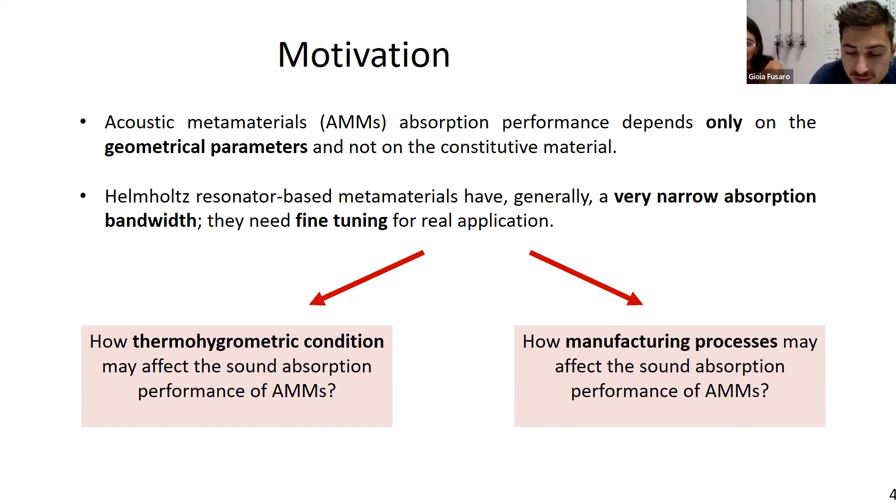So we asked two questions: how thermohygrometric conditions may affect the sound absorption, and how manufacturing processes may affect the sound absorption performance. For these two questions, we focused on our case study, which was the coiled up resonator.

That is made up of a spiral tube embedded in a rigid circular disc and covered by a front panel and a back panel. The acoustic properties of the coiled up resonator depend on geometrical parameters.

These are the length of the inner spiral, the size of the perforation, which in our case is square, the radius of the sample, and the porosity of the front panel, which is the ratio between the opening area and the total area of the sample.

The first step was to quickly prototype a sample of coiled up resonator with the following geometrical parameters: the length of the spiral, the side, and the diameter of the sample.

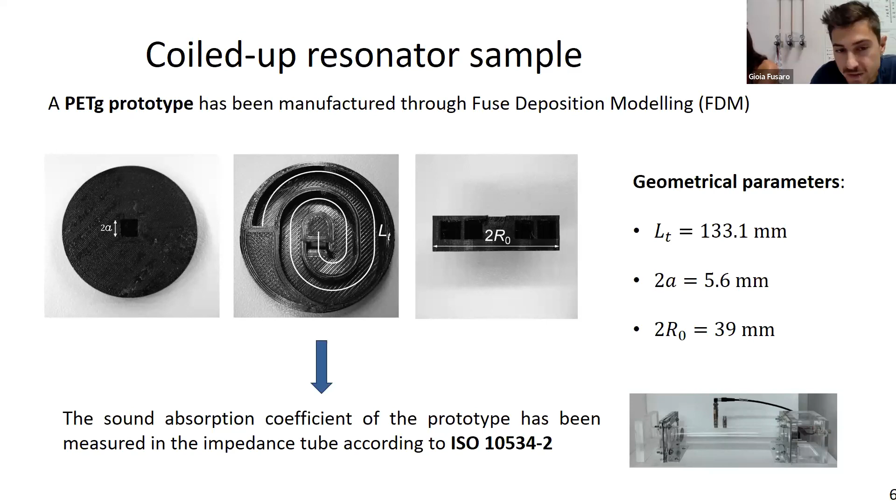We defined three parameters to take into consideration for our study: the max amplitude of the sound absorption, the frequency of the resonance, and the inverse of the quality factor.

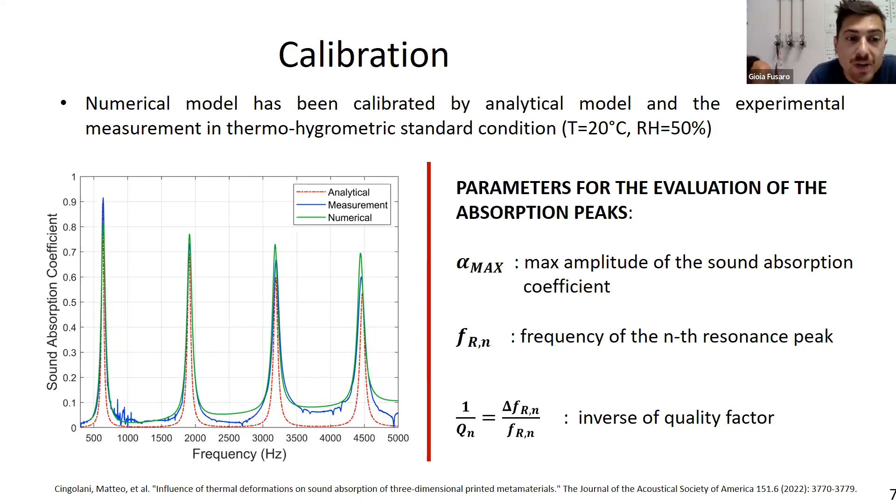And we investigated the thermohygrometric variation on the sample. First, we fixed a temperature of 20 degrees, and we changed the relative humidity from 20% to 80%, measuring the sample under these hygrometric conditions in the impedance tube. We found that the relative humidity variation turned out to be negligible, because it doesn't change the frequency and the amplitude of the resonant peaks.

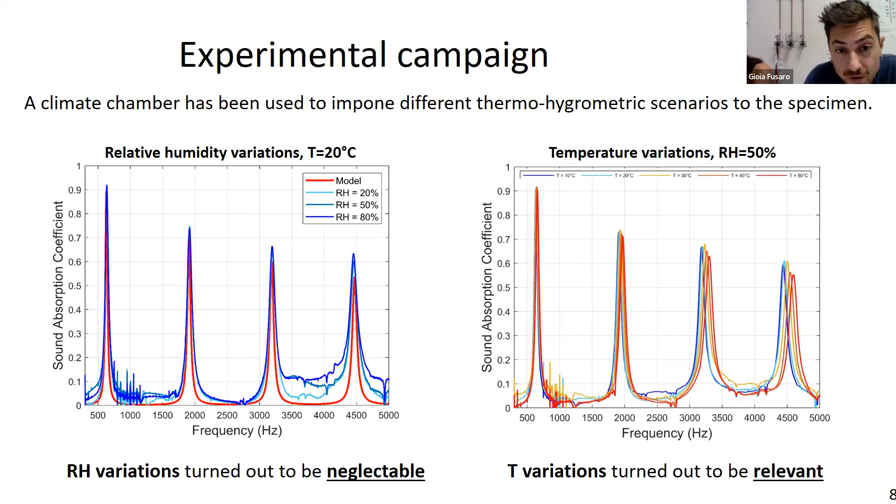On the other side, we fixed the relative humidity at 50%, and we made measurements with different temperatures from 10 degrees to 50 degrees with a delta T of 10 degrees. In this case, we found that the temperature variation turned out to be relevant.

So we focused on the temperature variation, and we studied the delta F, the delta frequency, for each peak of the resonator.

In the first peak, there is a delta F of 36 Hz from 10 to 50 degrees. The second peak shows a delta F of 64 Hz. The third peak shows a delta F of 122 Hz. And for the fourth peak, there was a delta F of 156 Hz.

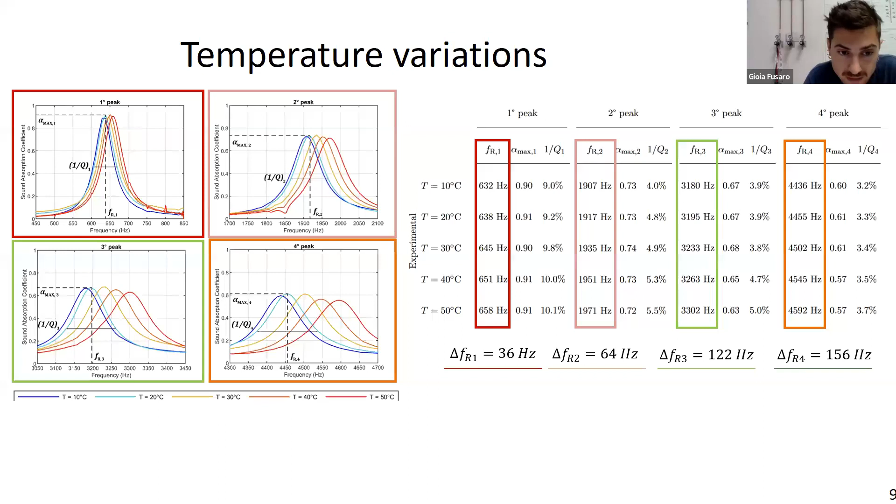So what does it mean? It means that as the temperature increases, the resonant frequency increases, and the reason why the resonant frequency increases is that there is a thermal expansion that shortens the length of the spiral and increases the frequency of each resonating peak.

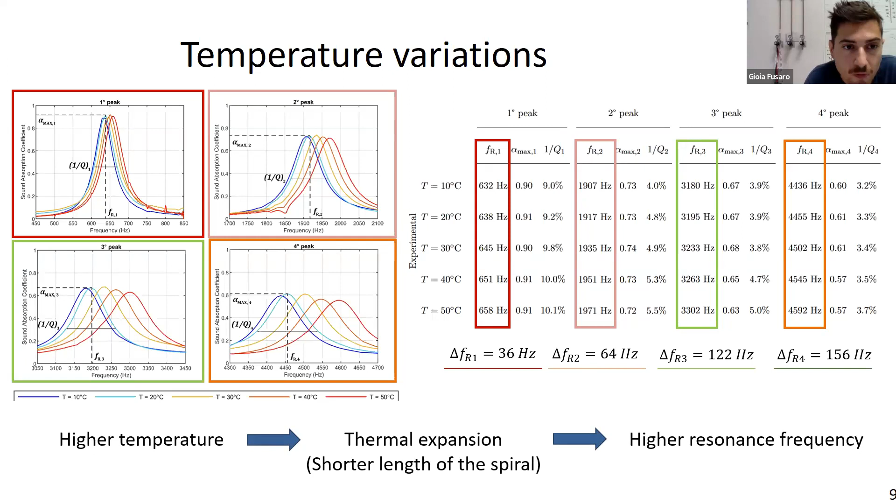At the end of the study, we compare the regression curve coming from the experimental data of the impedance tube experimental campaign with the Clash-Rynkiewicz model, a model that defines the behavior of polyethylene in terms of thermal expansion. Both follow an exponential trend.

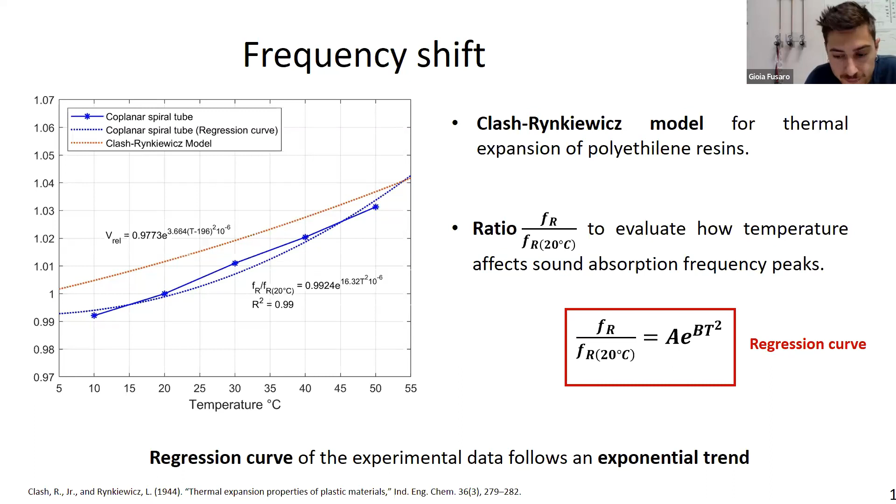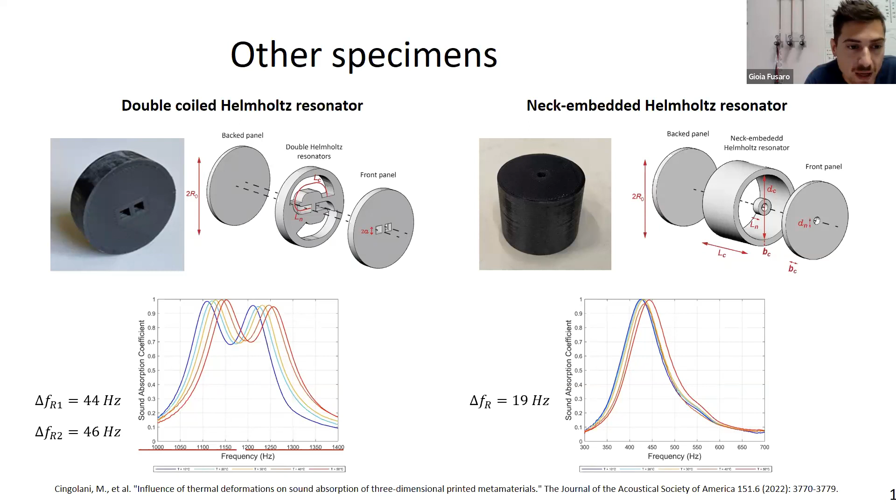We did the same for two other kinds of acoustic metamaterial, the double-coiled Helmholtz resonator and the neck-embedded Helmholtz resonator. The method was the same we used for the coiled-up resonator, and we found a delta F for both of them, and the trend the experimental data follow is always exponential, which could be compared with the Clash-Rynkiewicz model.

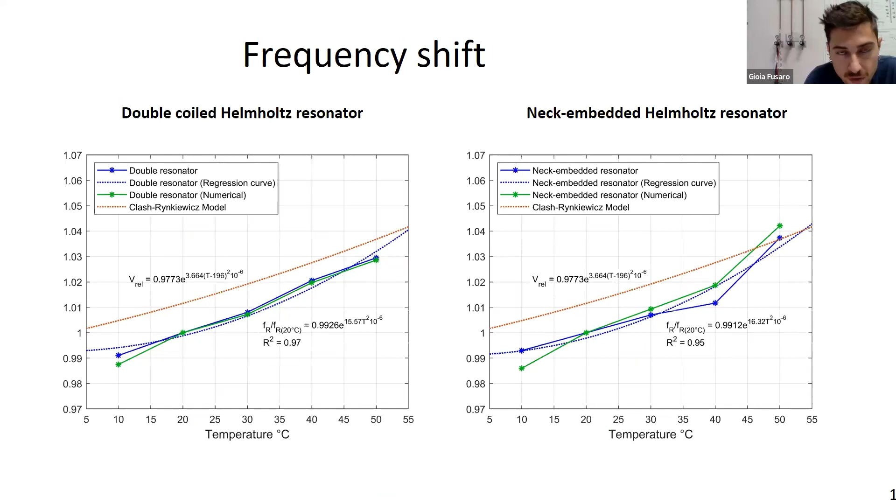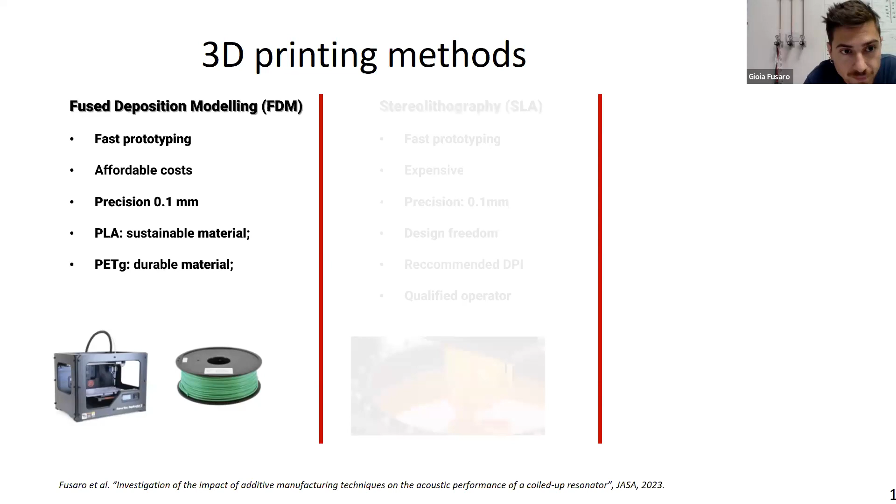After that, we focused on 3D printing methods, studying how manufacturing processes could affect the acoustic performance of the coiled-up resonator. We studied three different printing processes: fused deposition modeling (FDM), stereolithography (SLA), and selective laser melting (SLM). FDM is a very affordable process, and its main advantage is that it can use sustainable and durable materials like PET or PLA.

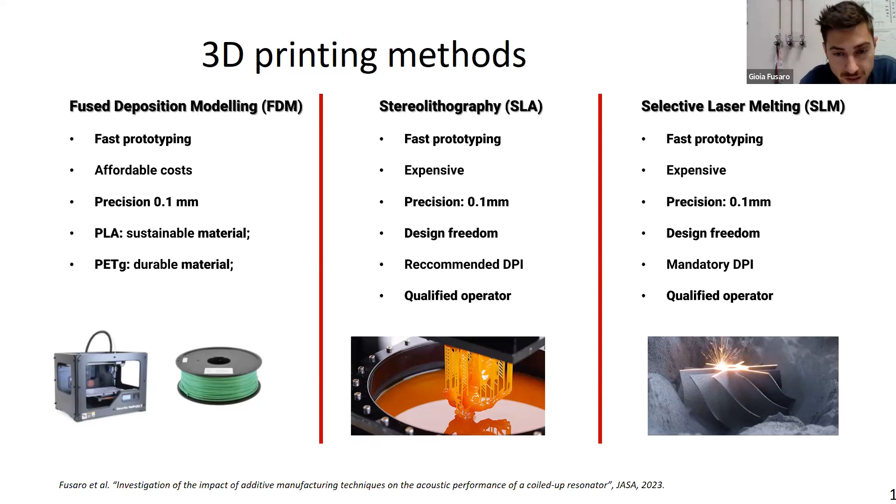Stereolithography is a more expensive process and needs recommended DPI and a qualified operator. Selective laser melting is also expensive, more expensive than FDM, and allows design freedom, but at the same time requires mandatory DPI and a qualified operator.

Our case study focused on three different printing technologies and four different samples. In particular, we can see in the picture a PLA sample made by fused deposition modeling, a PETG sample also made by fused deposition modeling, a resin sample made by SLA technique, and a steel sample made by SLM technique, in order to compare the variety of parameters involved in different manufacturing processes.

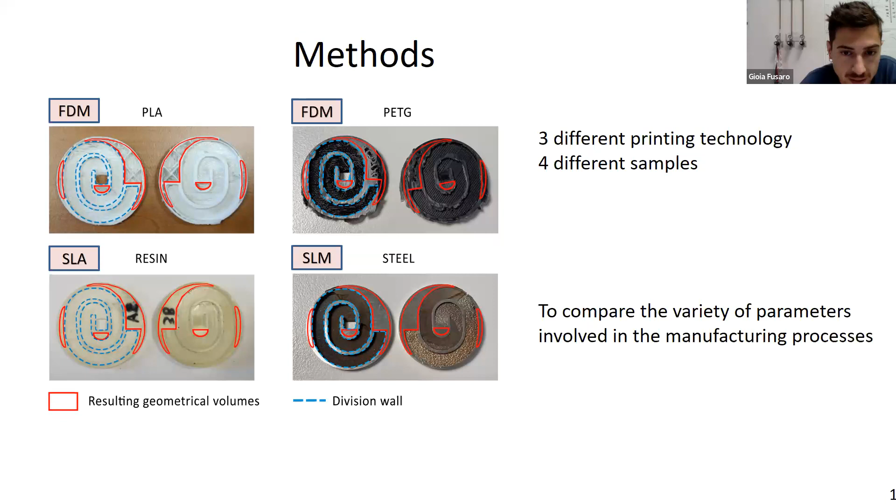The results of the first experimental campaign show that there are many differences in terms of sound absorption coefficient. In particular, we can see that the resin sample and the PETG sample match in a better way the analytical model of the coiled-up resonator. The other two, the SLM sample and the PLA sample, don't match the provisional model.

So we wondered which were the potential manufacturing parameters to consider to study their influence on the quality of the acoustic metamaterials. We found the roughness of the inner walls of the coiled-up resonator, the infill density of the samples, and the printing quality and speed parameters.

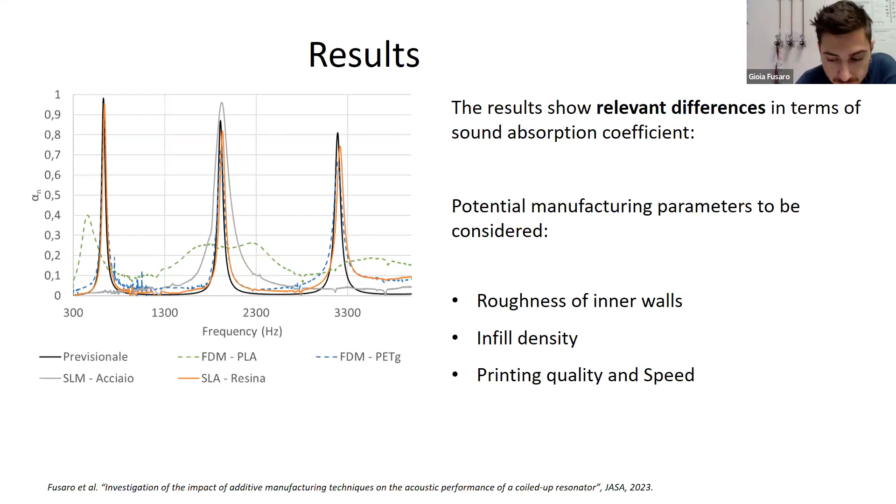The first step was to study the roughness of the inner spiral. We used a roughness tester to measure all the samples, and found that the best samples in terms of sound absorption coefficient were the PETG and the resin, but they showed different values of roughness. The PETG showed very high roughness values, while the resin showed a very low value of roughness. This means that roughness does not affect sound absorption performance, at least for the coiled-up resonator.

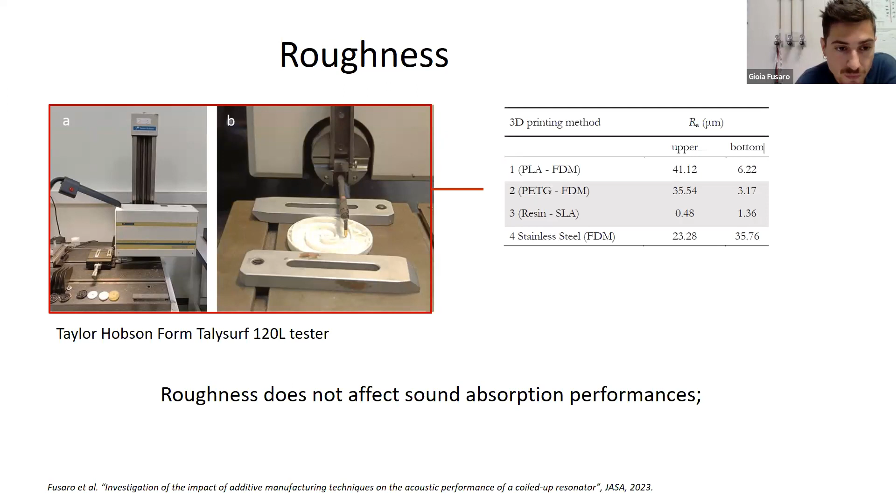On the other side, we studied the infill. To study the infill density, we set up a configuration for the PETG sample and 3D printed 5 different samples with different infill densities. We found that from an infill density of 30% onward, there is good matching with the provisional model, but below this value the experimental measurements show no matching. So it means the infill density affects the sound absorption of the coiled-up resonator.

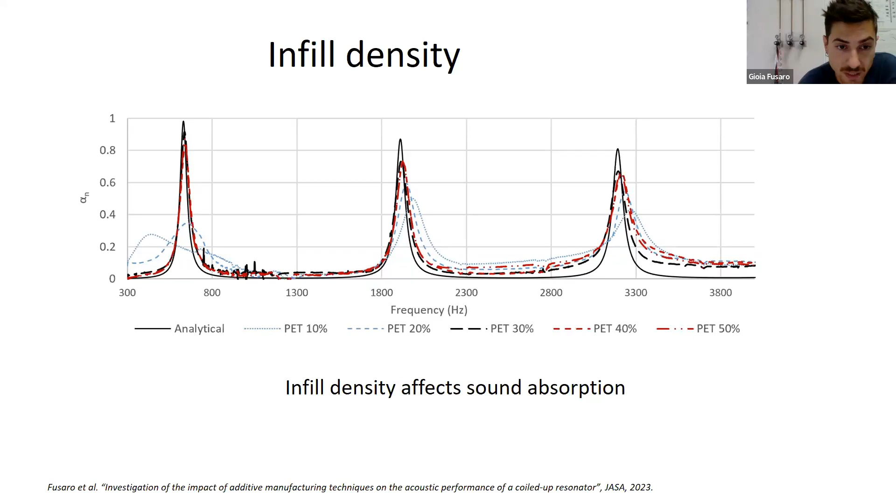The last part of the work was studying the different printing speed and printing quality of the 3D printer. We defined two different settings of printing speed, which we call the slow one and the fast one, and two different settings of printing quality, which we call the fine one and the coarse one. In total we could do four different combinations of printing, and we 3D printed four different samples.

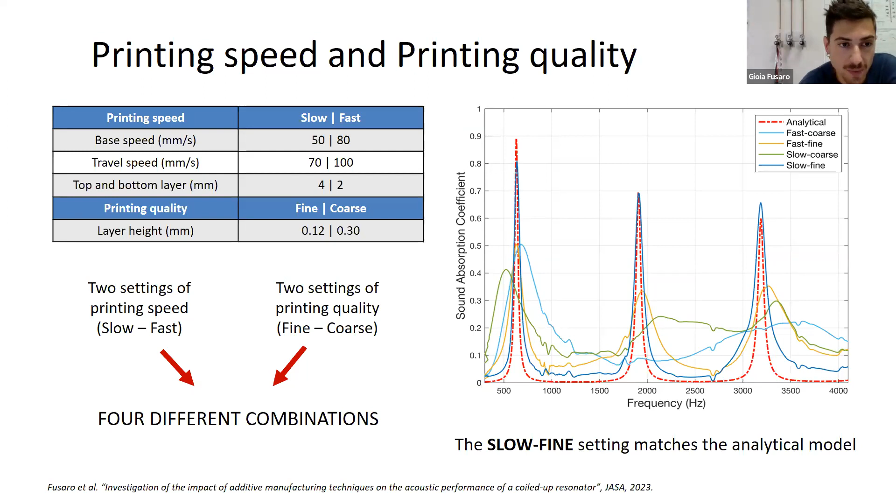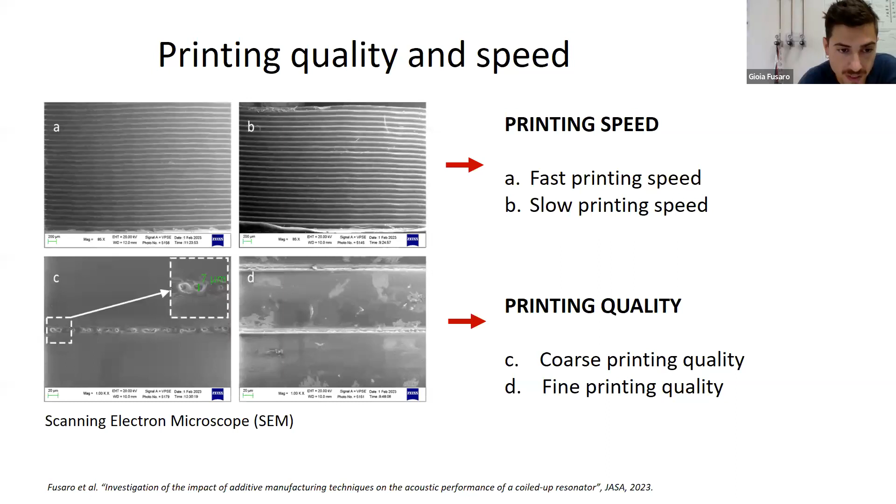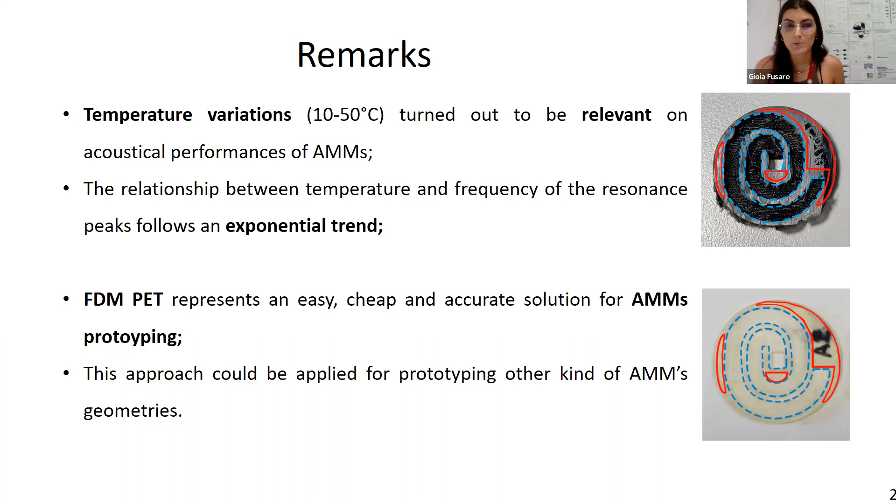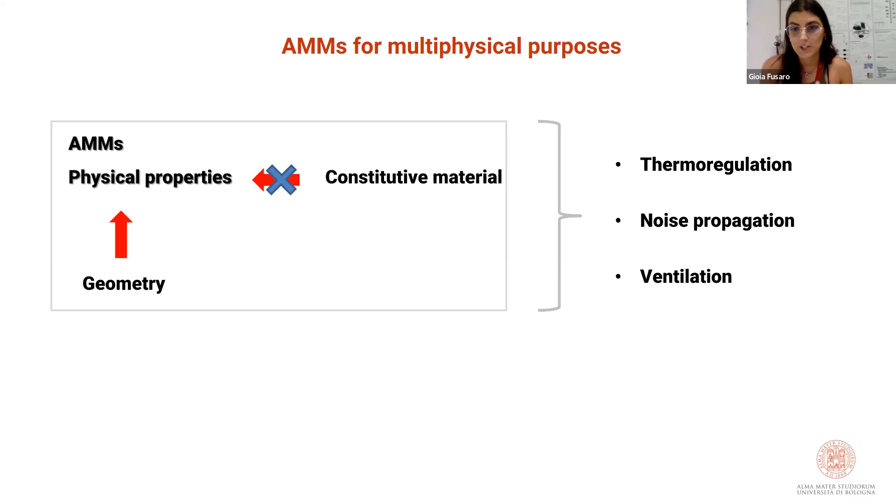So we can characterize them in order to optimize the final shape, for example for thermoregulation functions or noise propagation, insulation, or ventilation. For these specific tasks, we are going to see a case study represented by the acoustic metamaterial-based ventilated window.

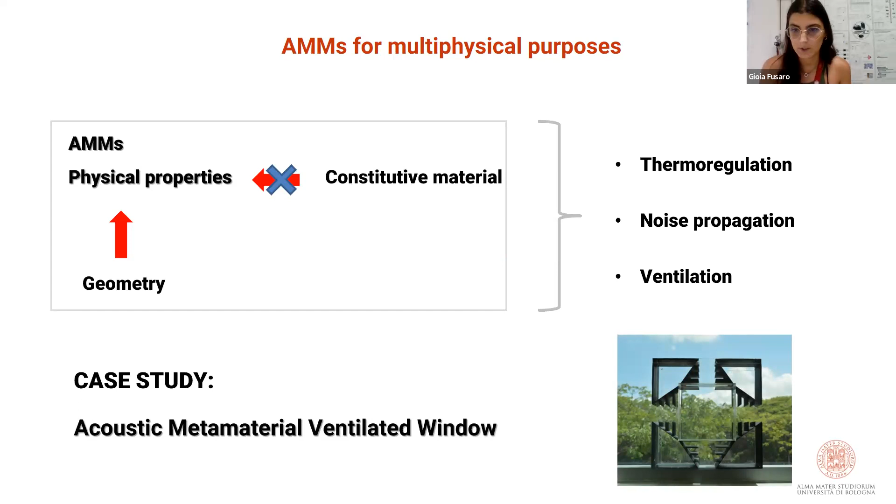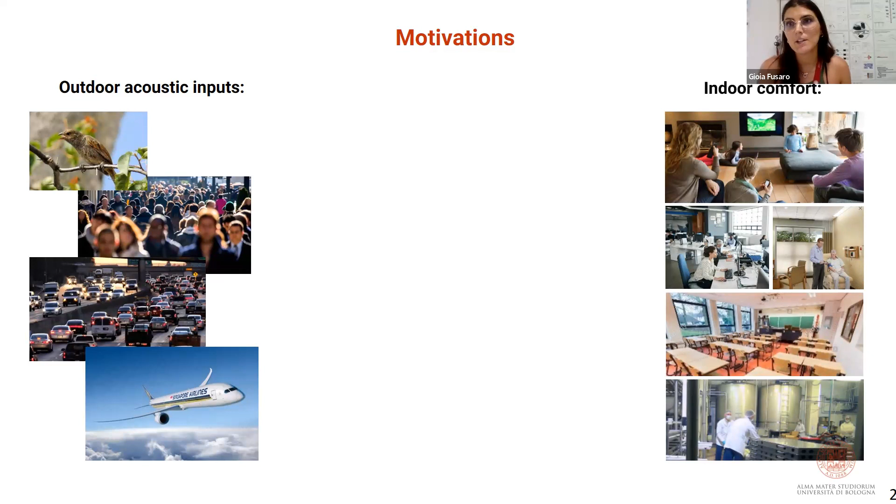First of all, we are all familiar with different outdoor acoustic inputs, and this is something everybody can relate to, compared to different indoor comfort scenarios. These are definitely two opposite sides when we consider outdoor and indoor inputs, and we are going to analyze how we can filter or optimize the first in order to have optimal indoor comfort towards the second.

At the same time, we all know there are already existing methods that can solve this problem, for example activating active noise control or through mechanical ventilation. However, at the same time, we have to face the environmental issues that we are going through and will go through in the next years and decades.

And for this reason, regulatory governations are going to ask and suggest we develop as passive as possible systems, in order to make new technology as sustainable and environmentally friendly as possible. From this motivation came the idea of an acoustic metamaterial-based window, which I started in Sheffield and Singapore, and now I'm continuing here in Bologna with the industrial engineering group.

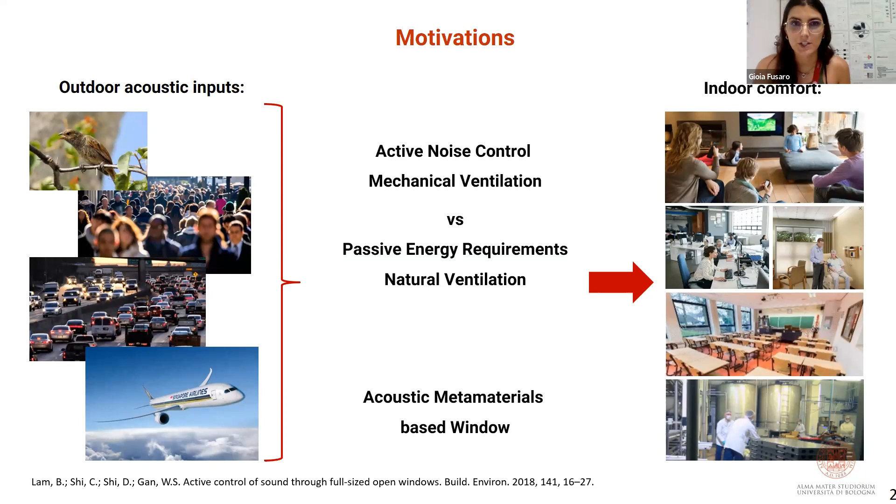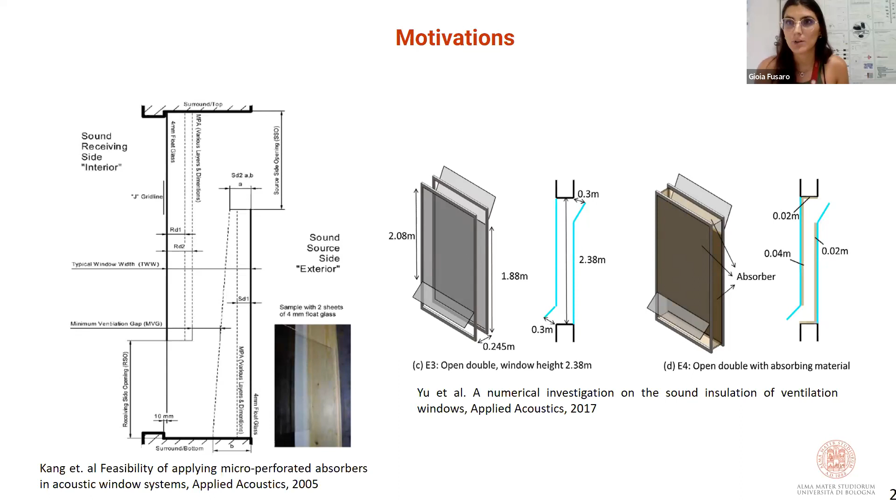For window design, we already had some attempts at solving this problem, allowing natural ventilation and noise insulation at the same time. However, most of these attempts ended up as quite bulky solutions, limiting the design from the designer's, architect's, or engineer's point of view.

On the other side, in the last decades, metamaterials have paved their way for improving engineered systems, optimizing them from both a constitutive material point of view and a multi-physical function point of view. However, there is still a lack of ergonomic studies and guidelines that can help researchers or engineers design metamaterial-based products toward a more ergonomic and user-centered approach.

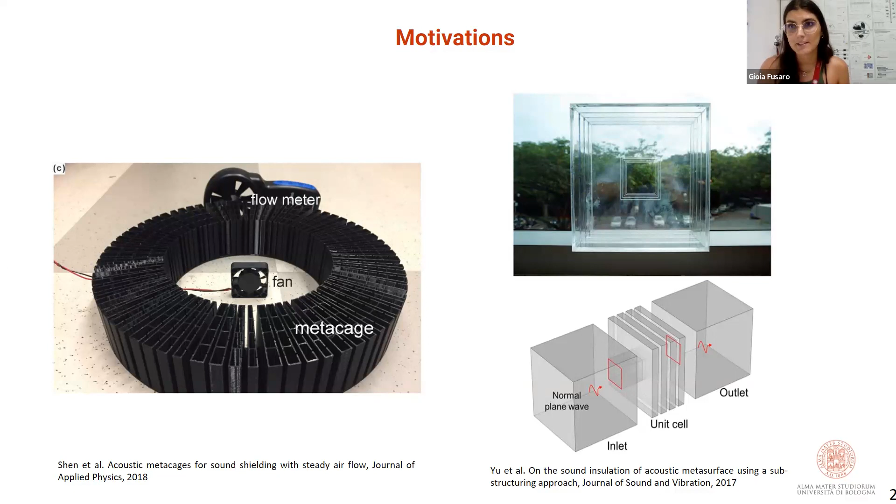For example, this first example comes from my PhD research, where we focused the metamaterial technology on the outer part of the system, leaving the central part to function as a visual connection - a transparent panel - and using the lateral part for noise regulation and ventilation.

As we can see, this is a quite basic acoustic metamaterial approach using an acoustic black hole system, or quarter-wavelength resonator system, applied in a three-dimensional configuration. In this way, airflow passes through the system while the incident noise wave is partly reduced by the resonating flanks and volumes facing the ducts where the noise passes through.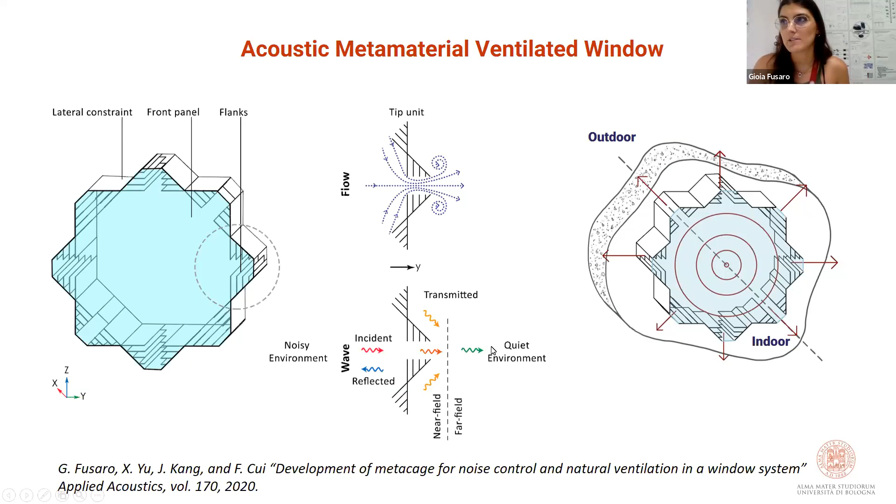Since this research was a mix of both material research and social science research, after designing and defining an optimal unit cell, we developed it to create an acoustic metamaterial to solve this problem. We then tried to adapt it in the most ergonomic way possible, through both questionnaire and participatory design methods. This way, we managed to reach a design that could allow both the physical function and an ergonomic approach usable by the final user as well.

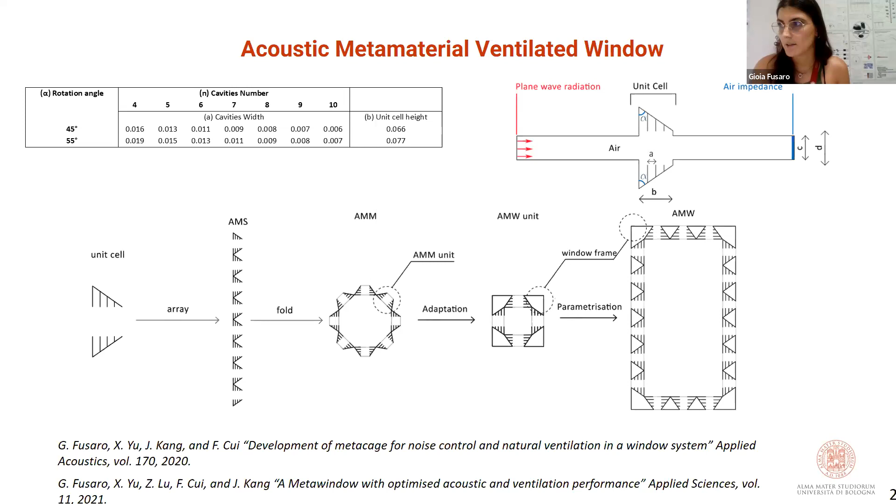This metamaterial-based window is applied on the outer wall of the building, dividing the outdoor condition from the indoor condition, and is characterized by two parameters significant from the participatory design research: the height of the frame of the window, and the different openings in order to allow gradually more or less ventilation flow.

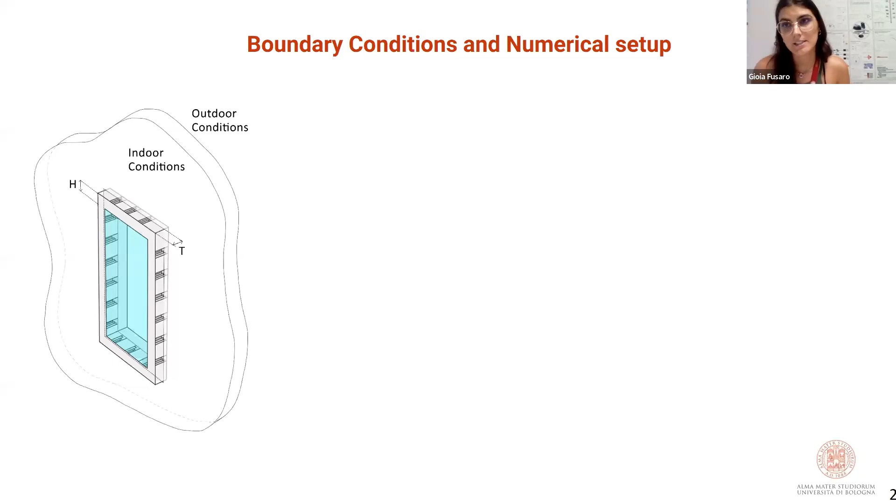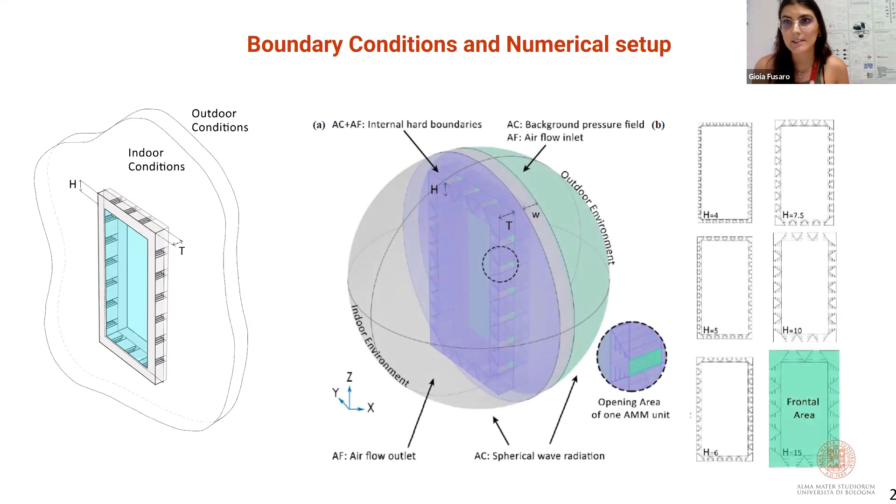This is a very brief configuration of how the model was done in a numerical study through COMSOL Multiphysics. This numerical part was used for optimizing the design of the model through different geometric parameters.

We need to consider the configuration optimization going from the first one, where the acoustic metamaterial unit cell is presented with panels inclined at angle alpha with different flanks that produce resonant cavities facing the ducts, where both airflow and acoustic wave propagate through.

We wanted to optimize it also from the space, exploiting as much as possible all the volume included in the system of the window. To do this, we perforated the panels facing the cavities and the duct, allowing us to have a higher volume of resonance.

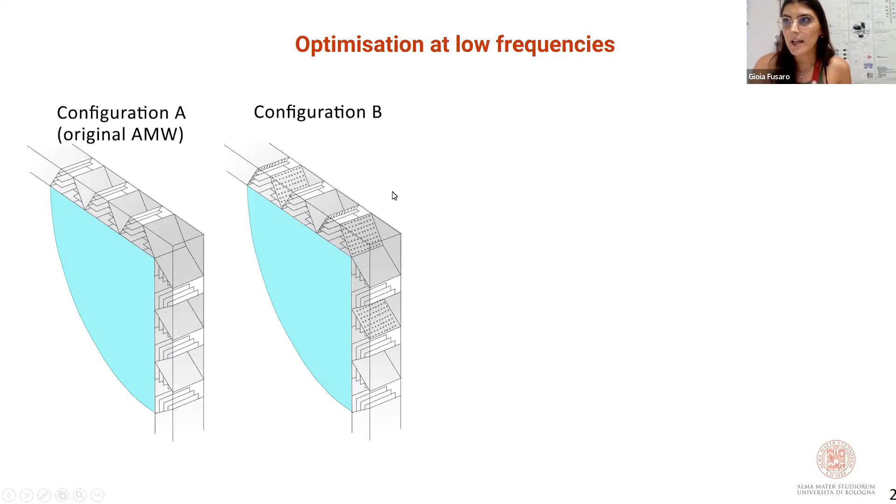For the sake of industrial design strategies, and different manufacturing approaches, we decided to try and test two different configurations of perforated panels. The first one, called configuration B, has both perforated panels facing one duct, meaning we have two different unit cells to be produced: one with the panels perforated, and one with the panel not perforated.

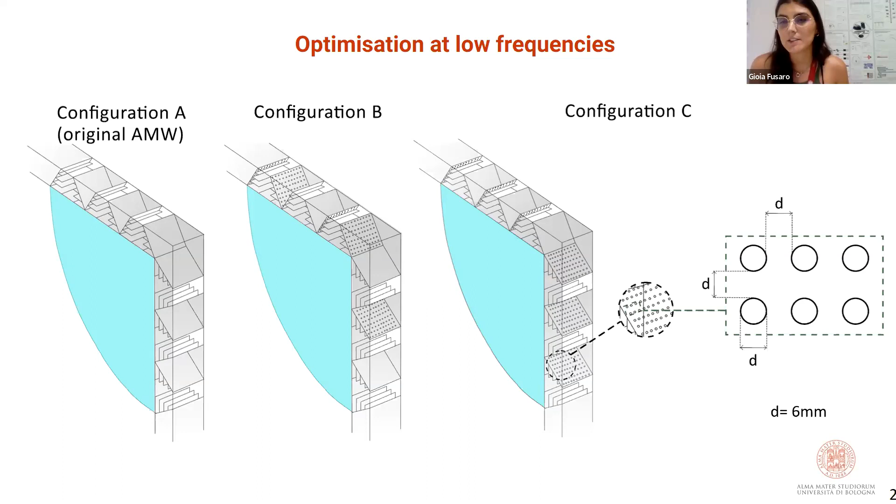In configuration C that we tested, the acoustic metamaterial unit cell is just one, reducing the effort on additive manufacturing for industrial purposes. This was again tested to understand if we could optimize the design for the later parts of manufacturing.

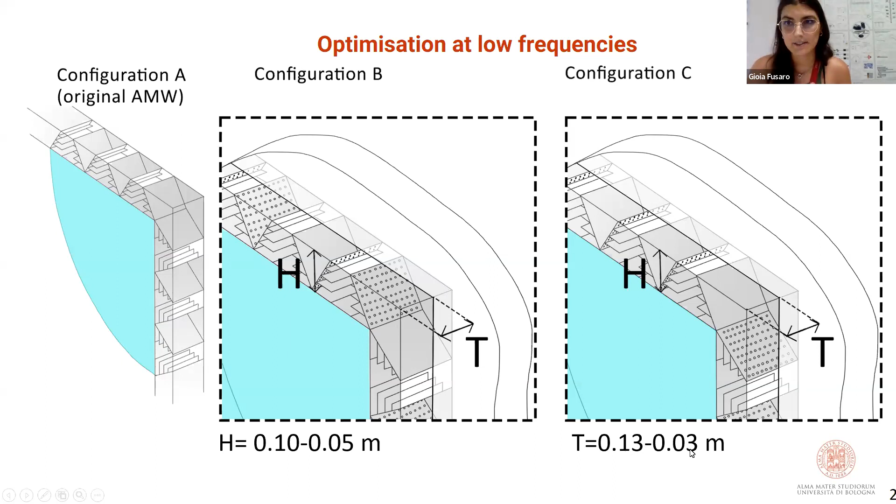Here are the two parameters investigated with a parametric sweep to understand the different properties of this configuration. The variation was specifically related to the height of the frame, from 10 to 5 centimeters, while the opening of the window varied from 13 up to 3 centimeters. Let's go through the results briefly.

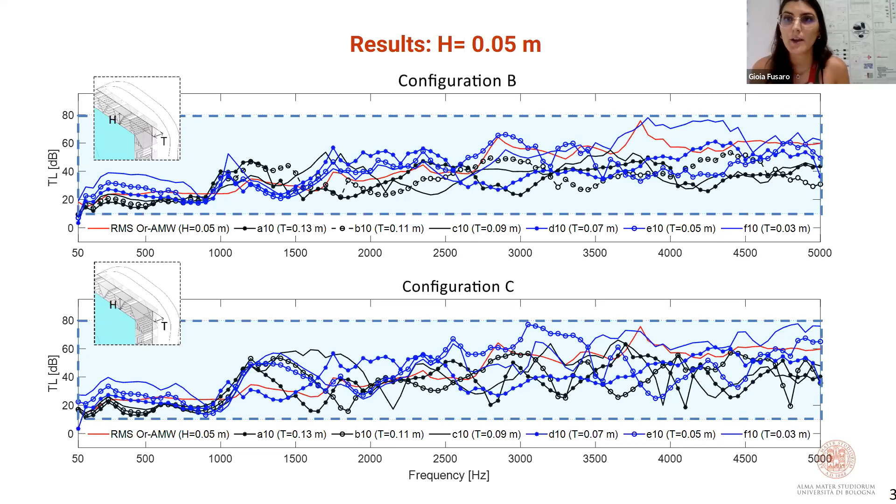The red graph represents the previous configuration. With the optimization, we arrive at a lower frequency transmission loss, and we found that different ventilation degrees, different opening degrees represented in all these graphs, are allowed with the same transmission loss and noise impact of the window, meaning it doesn't matter how much you open the window—the noise insulation effect will still be in place.

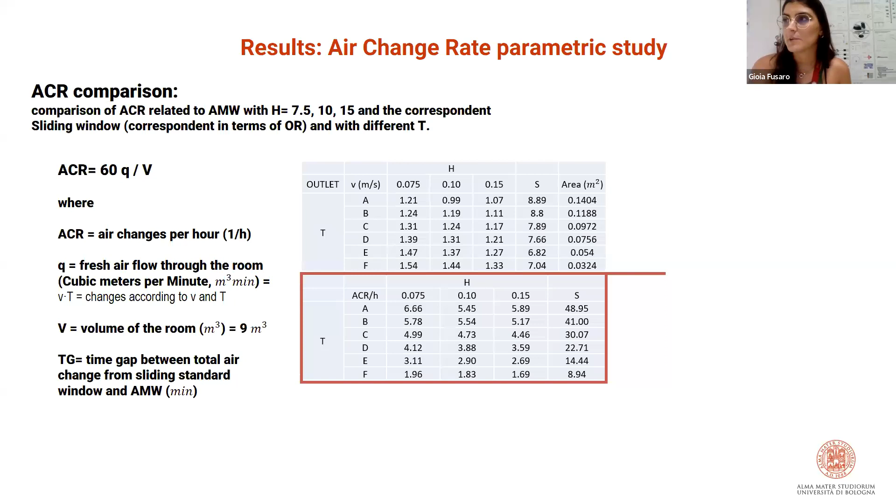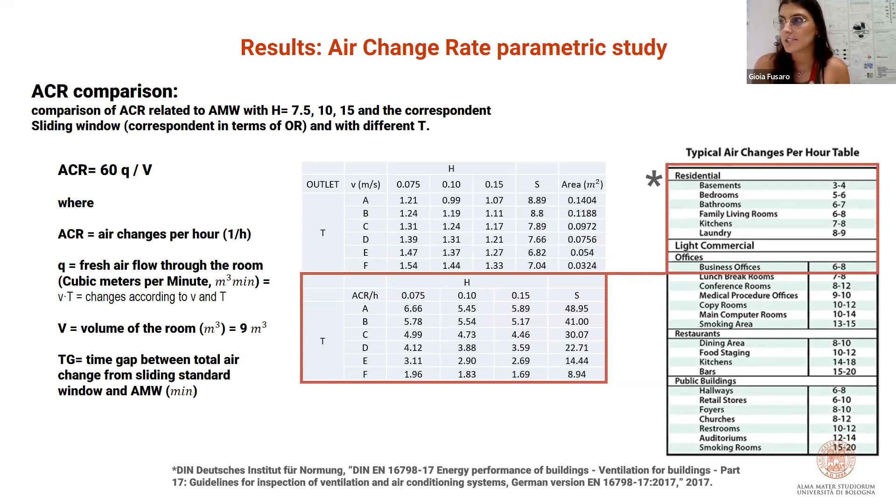At the same time, we tried to understand the properties in terms of air change rate, and thanks to different ISO and governmental guidelines, we managed to quantify the air change, which can be compared at the moment. We haven't implemented the ventilation part yet, but we are doing it now. So far, the results are quite close to the requirements for residential and light commercial spaces such as offices and business offices.

In the final part, we studied a previous, not-optimized model of the metamaterial window from a different user perception point of view, considering psychoacoustic parameters, where psychoacoustics is the science of sound perception, which investigates acoustic stimuli and hearing sensation through statistical relationships.

In this case, we evaluated parameters such as loudness, roughness, and fluctuation strength. At the same time, we tried to attempt a soundscape descriptor investigation as well. Soundscape was first introduced by Murray Schafer, and it is the acoustic environment as perceived, experienced, and/or understood by a person or people in context.

As we can see, regulatory systems are already considering soundscape for the future development of our society and our cities. We considered quite different descriptors from soundscape, going from pleasant, chaotic, vibrant, and uneventful, up to calm, annoying, eventful, and monotonous.

We recorded the filtering effect of the non-optimized window on different environmental recordings, and then asked users to judge them according to different soundscape descriptors.

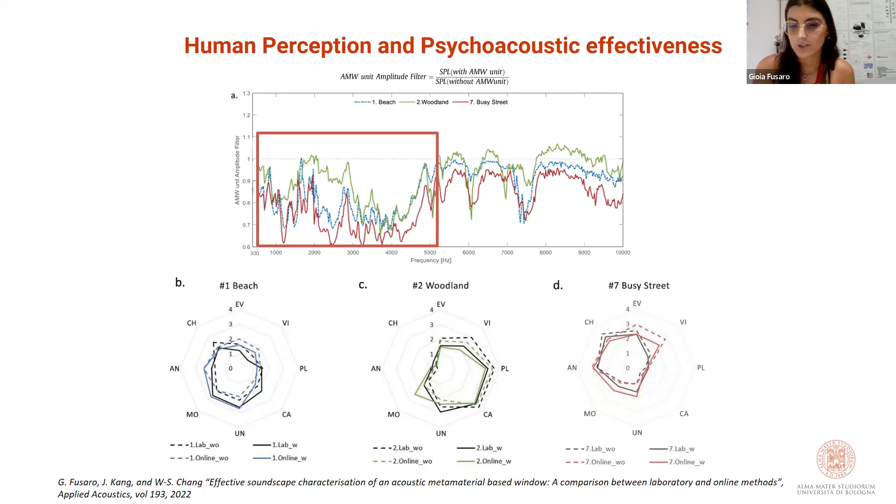So I would like to end this presentation just briefly taking all the bits that we have analyzed so far, from Matteo's presentation to my presentation. So what we are trying to do now is not something that is finished yet, but we are trying to work on it together with other research groups in Europe and abroad. What we start from is generally an analytical investigating method, used for reproduction and combination of already existent metamaterials for sound and thermal control.

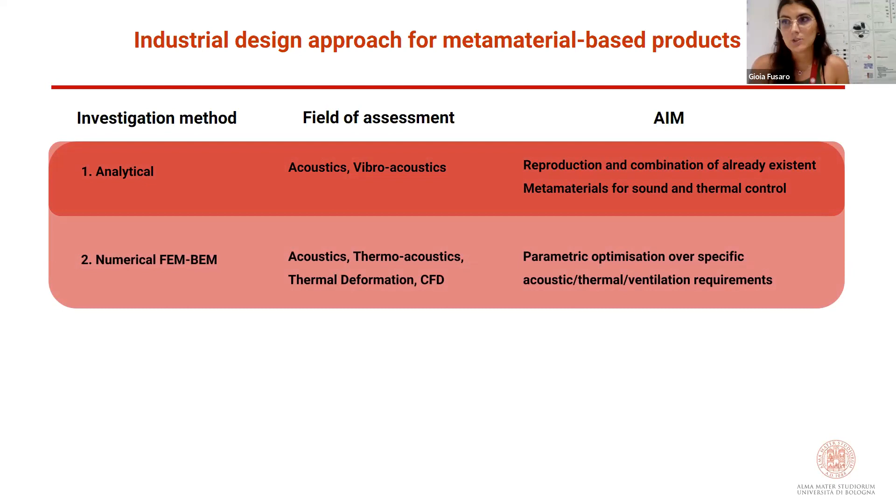The next step is the numerical analysis, which is basically used for optimizing specific geometrical parameters for a targeted frequency or ventilation performance. After that, we have a validation of this model through experimental measurements. And finally, one of the most important parts, which we are approaching right now, is the ergonomic and human perception assessment.

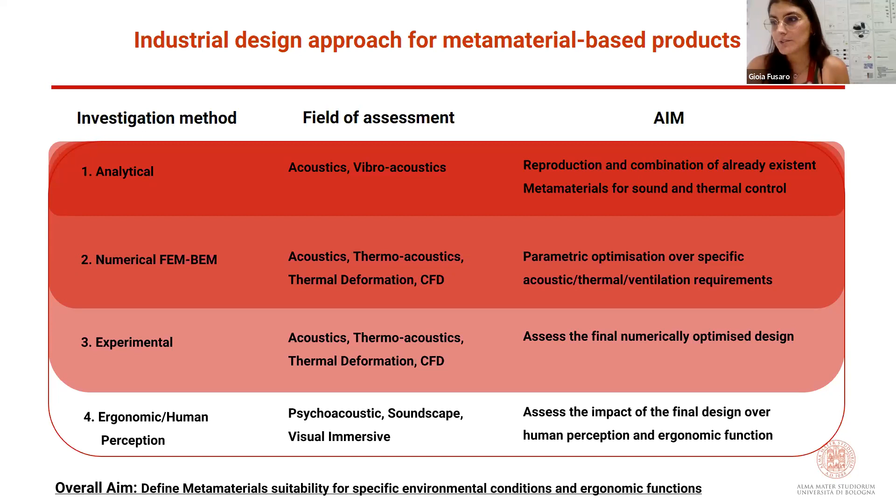So through social science study applied for industrial design, we try to achieve as much information as possible on how the final user will feel more comfortable using a product based on metamaterials, and the different relationships that users connect with the product itself. What we are trying to aim at in this stage is to define different suitabilities for metamaterials and suitability techniques for specific environmental conditions and different ergonomic functions.